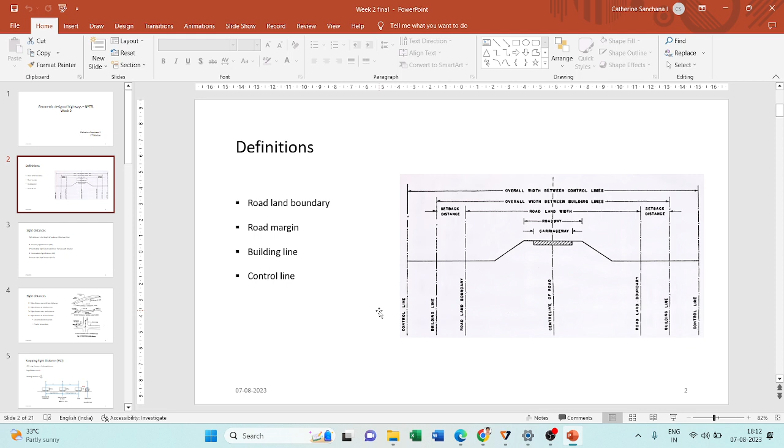So first we will start with the basic definitions. Last week we discussed about design controls, right? And at the end of the topic, we spoke about space requirement. So we will continue with that and some definitions related to space requirement. So one is the road land boundary. So this is the distance. So if you see, this is my carriageway.

Carriageway is the way where the vehicles travel, and adjacent to the carriageway, you will be having shoulders, and the entire width of the carriageway along with the shoulders, you will call it as the roadway. And this entire width, along with provisions for drains and also provisions for future expansion.

Say if I have only 4 lanes now, and in future, based on the traffic growth rate, I might require 6 lanes. So I need some more land, some more space at the sides for future expansion. So including all that, this is just a hypothetical line. Okay, so including all this drainage, carriageway, shoulders, and future expansion, you call it as the road land boundary. Okay, so this is the road land boundary.

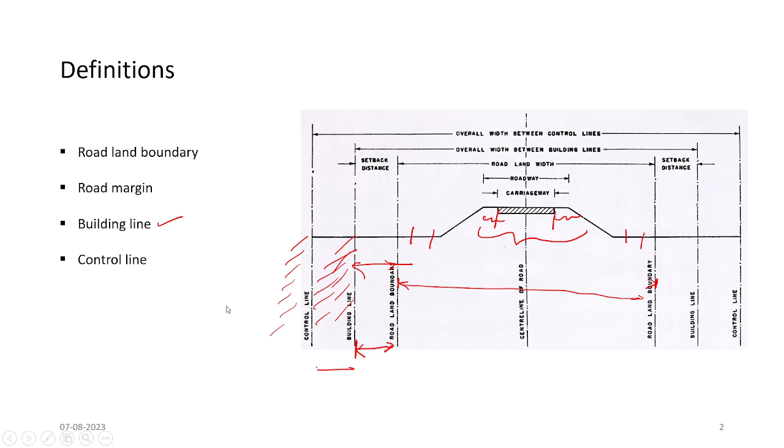Okay, so now moving on to the next topic, which is sight distances. So I want to make this session an interactive one. So it would be nice if one of you could unmute and tell what is a sight distance, what is your understanding of sight distance.

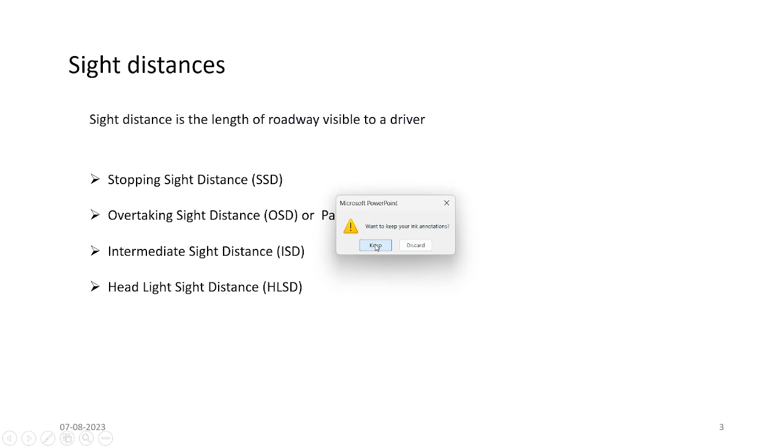No one is going to judge you here, and no one's going to know who is who, so you can openly speak. So what is a sight distance? What is your understanding of sight distance? Because when I was in my BTech, sight distance was kind of confusing to me. So is anyone ready to answer? Okay, then I will answer it myself.

Okay. Sight distance, as it is written here, in simple terms, is the length of roadway visible to a driver. Say you are traveling on a road; at any point of time you will be able to see some distance ahead of you, right? And whatever the distance ahead of you, you should be able to see at least a minimum of sight distance.

Say this is my road, and this is my vehicle. When I'm at this point, say I am able to see till here. My eyesight allows me to see till here. Anything that comes till here, my eyesight is able to see. We will leave out our eyesight and go to the geometric constraints of the road. So our roadway is visible till here. So this distance should be a minimum of SSD.

Okay. Now when I move forward here, I should be able to see a minimum of sight distance, which will be till here. So at any point of time, the roadway which is visible to you, in front of you, should have a minimum distance of SSD. So what is SSD? We will talk later. We were seeing what sight distance is.

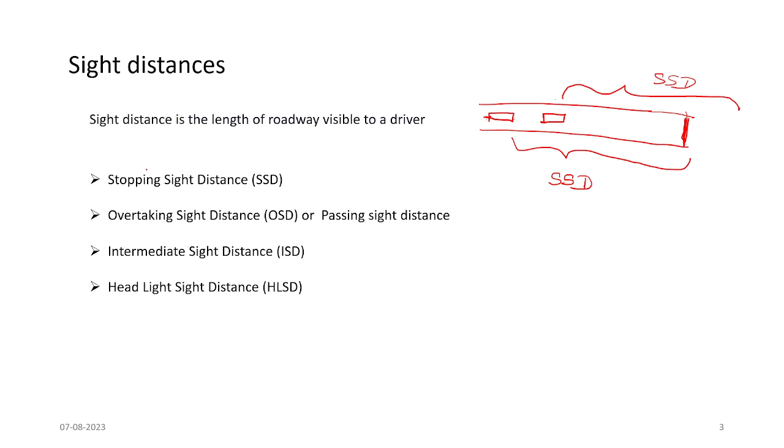Okay, so after this we will see what are the different types of sight distances. Sight distance has many types. The four types that I said here are based on the movement that you make, or based on how you calculate the sight distance: stopping sight distance, overtaking sight distance. So these are different types of sight distances based on one type of classification, and these are another set of sight distances based on where you provide the sight distance.

Say sight distance on multi-lane highways. Are you talking about the sight distance when you are traveling on multi-lane highways? Are you talking about sight distance when you are traveling on a circular curve or on a vertical curve, or say an intersection like this where you have a signal or without a signal? Signal is not a problem. If it is without a signal, then you should be talking about sight distance there also. We will talk about sight distance at an uncontrolled intersection, at a priority intersection, and so on. So these are the different types of sight distances. One is based on the movement that you make, and the other is based on the geometry of the roadway.

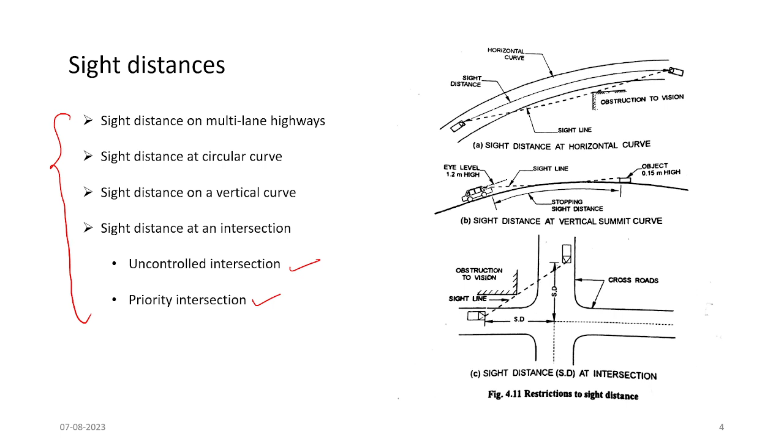Okay, now we will move on to stopping sight distance. So let me just check if there are any questions. Okay, Kavita, is there any question? I see that you've raised your hand. Would you like to? Yes, ma'am. Hello. Yeah, sure. Hello.

Go ahead. Ma'am, I didn't get the exact basic difference between sight distance and stopping sight distance. Okay. Sight distance is, see, when you are traveling on a road, the distance which is visible to you in front of you is the sight distance. Stopping sight distance is the distance that is required for you to stop the vehicle. When you plan to stop the vehicle, you will need some time to make the decision whether you should stop the vehicle or whether you should just slow down your vehicle. So you need some time to take the decision, and after that you will apply the brake. When you apply the brake also, your vehicle is not going to stop immediately. It is going to travel some distance before it comes to a stop.

So the time taken by you to take the decision, during that time also your vehicle would have traveled some distance. And when you apply the brake also, your vehicle is not going to stop immediately, it is going to stop after some distance. So this total distance is what is called the stopping sight distance. When you want to stop the vehicle, you need to see some distance in front of you. If not, you will hit someone. Whereas sight distance in general is the length of the road, the distance which is seen by you. Okay, is it clear?

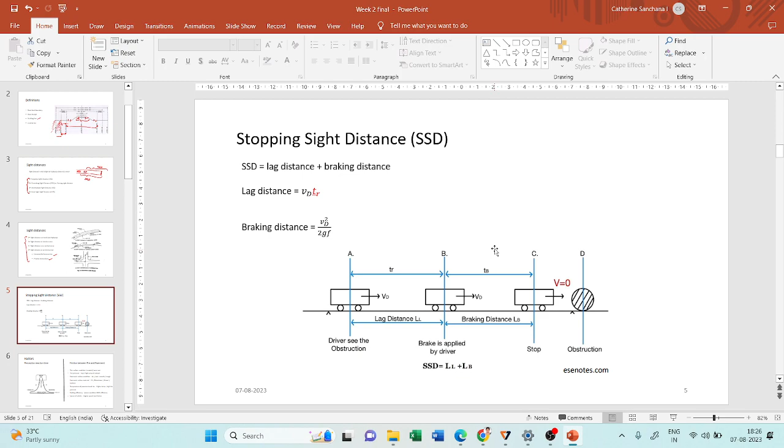So, as I was saying, we will begin with stopping sight distance. Now, what is stopping sight distance and how is it determined? Stopping sight distance is the distance that is required for the driver to stop the vehicle. Now why do you need some distance to stop the vehicle? Imagine I am traveling on a roadway and all of a sudden I see an obstruction. Say a dog is crossing by, then I need to do something so that I do not hit the dog.

There are three maneuvers that I can make to avoid hitting the dog in front of me. Either I can bring the vehicle to a stop, I can apply brakes to my vehicle and bring the vehicle to a stop.

So let me draw. So this is my road and I'm traveling here, and here I see a dog. Okay, either I can apply brakes and bring the vehicle to a stop before I could hit the dog, or before the position of the dog, or there's one more option where you just decide to slow down your vehicle. You see that the dog is only crossing and it is not going to be there stagnant. So if it is just crossing, till it crosses, you just need to slow down your vehicle so that after it crosses, you can just pick up your original speed and move ahead.

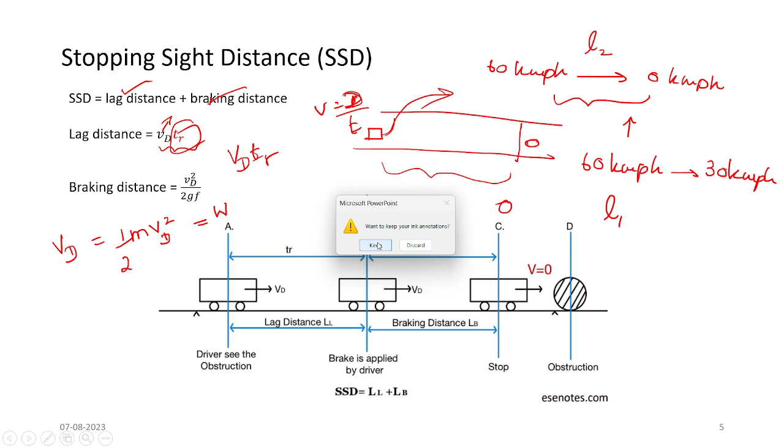Okay, so whenever a vehicle is moving with a velocity and it has a mass, then it has some kinetic energy associated with it. So when my vehicle is moving with a velocity of Vd, it has a kinetic energy of half m Vd square. Now this is equal to the friction that is associated with the vehicle. Let me go to a new slide.

So this object will have a kinetic energy. Kinetic energy is equal to half m Vd square, where m is the mass of the vehicle and Vd is the velocity of the vehicle. So the kinetic energy of the vehicle when it is moving at a velocity of Vd is half m Vd square. Now this kinetic energy change is nothing but work done due to friction force. No, let me explain like this.

So this is the road, and initially it has a speed of Vd, and when it comes to rest, it has a speed of 0. So there is a change in kinetic energy, right? It has a kinetic energy of half m Vd square at this point, and it has a kinetic energy of 0. This change in kinetic energy is because of the brakes that I'm applying, and it comes to a stop because of the frictional force between the tire and the pavement.

Okay, so I'm going to equate these two. So the change in kinetic energy, which is half m Vd square minus 0, is equal to the change in frictional force.

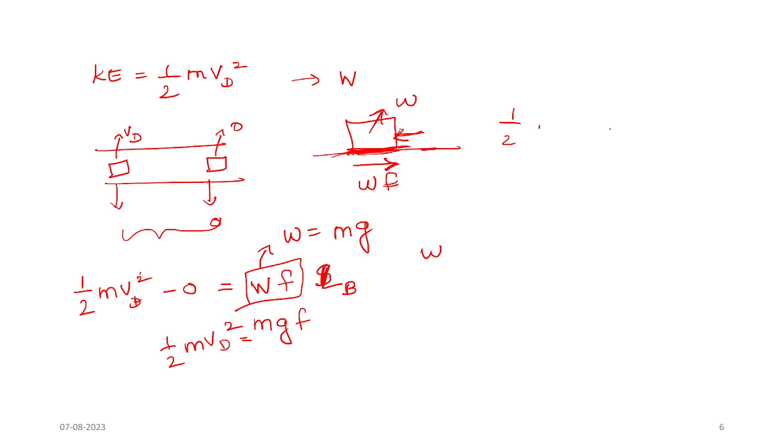Sorry for confusing. So the change in kinetic energy is the work done by the system due to the frictional force, and this work done is nothing but this frictional force into distance traveled. So half into mvd square is equal to wf into lb, where lb is the braking distance. So if you substitute for weight as m into g and rearrange, you will get lb as vd square divided by 2gf. So this is how you will get the braking distance.

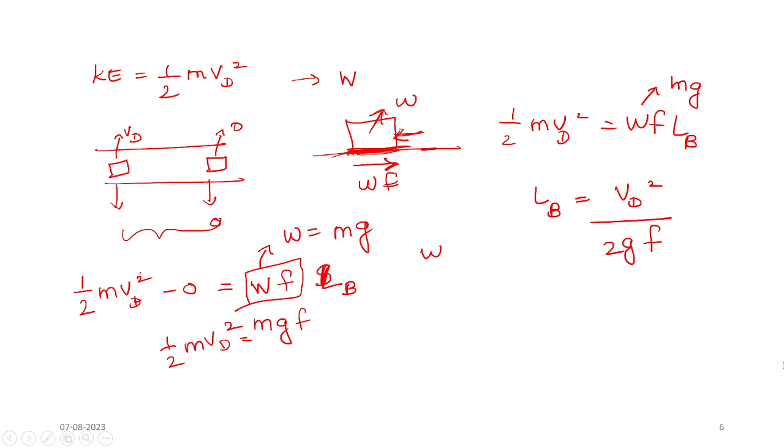Now moving on to the factors that affect this sight distance. So if you see from the equation here, for lag distance, obviously in both these terms, the vehicle speed is going to affect the sight distance. Since it is directly proportional, since it is in the numerator, with an increase in speed, my sight distance is going to increase. So that is obvious, very clear.

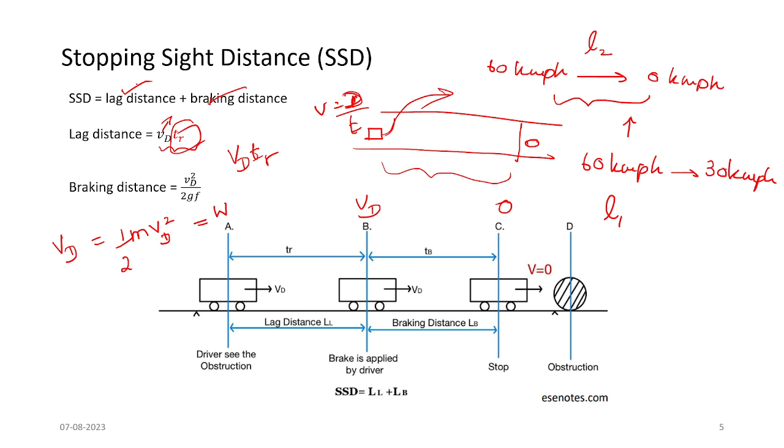Now, there are some more terms associated with it. G, acceleration due to gravity, is constant. Except for some points on the earth, it might vary a little bit, but mostly we will take the average acceleration due to gravity as 9.81, right? So leaving behind Vd and G, what are the other factors that affect sight distance? It is the perception reaction time and the longitudinal friction coefficient F. So these are the two factors that affect the stopping sight distance.

So let us see about the perception reaction time. It has four components, which we call the PIEV theory. It is the time taken for you to perceive the situation, and then I is for your senses to connect to the brain to say that I have perceived some situation. So first, P is for you to perceive the situation, that I have seen some obstruction and that I have to do something about it. So you transfer this information to the brain.

Now this information goes to the brain, and the brain will take some decision on what needs to be done, whether you have to stop the vehicle, slow down the vehicle, or just turn the steering of your vehicle. So your brain has to take some decision, and then it has to command your senses to apply some action. Say it will ask your leg to apply brake on the system, or ask your hand to apply brake on the system. So this theory is called the PIEV theory.

So for the reaction to go from your body to the brain, and from the brain the command has to come to the system to take some action. During this phenomenon, there is some time associated with it, which we call the perception reaction time. Now, this will depend on many factors, such as the experience of the driver, the gender of the driver, the mood of the driver, the condition of the driver, and so on. So perception reaction time depends on the type of the driver and his characteristics.

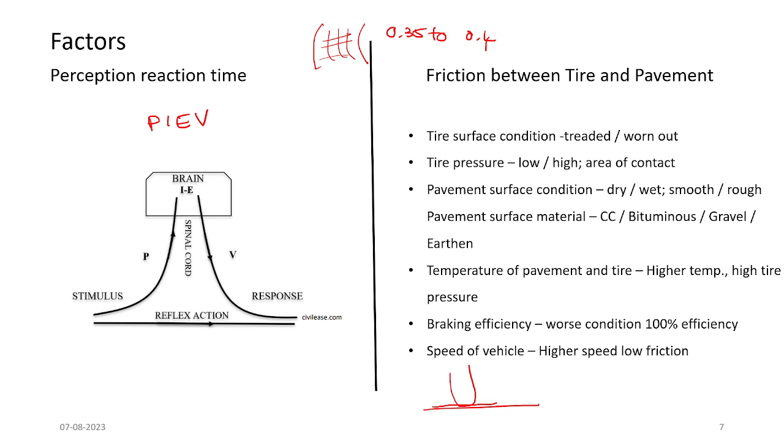It will usually vary between 0.35 to 0.4. This is the longitudinal frictional coefficient, and this variation of 0.35 to 0.4 will depend on the speed of the vehicle. Okay, so that tabular column has also been shared by Sir.

Now, what we were talking about till now is stopping sight distance on a level surface. Okay, so when you are traveling on a gradient, on a sloped region, the stopping sight distance will be more or less depending on how you travel on the slope: if you're traveling on an upward slope, or on a downward slope. Now, say if you're traveling on an upward slope, your braking distance is going to be less.

When you apply brakes, the lag distance is going to be the same everywhere because it depends on my reaction time. It does not depend on the surface of the road. So lag distance is going to be the same everywhere, even on a sloped region, even when you're traveling on a gradient. Whereas the braking distance will depend on the slope, because if you're traveling on an upward gradient, when you apply brakes, it will come to a stop much sooner because the gradient is also supporting you.

When you're traveling on a downward gradient, there's gravitational force which is against you, which pulls you further. So there's an effect of this gravitational force when you travel down the slope. So the stopping sight distance or the braking distance will be more when you travel on a downward gradient, and it will be less when you travel on an upward gradient.

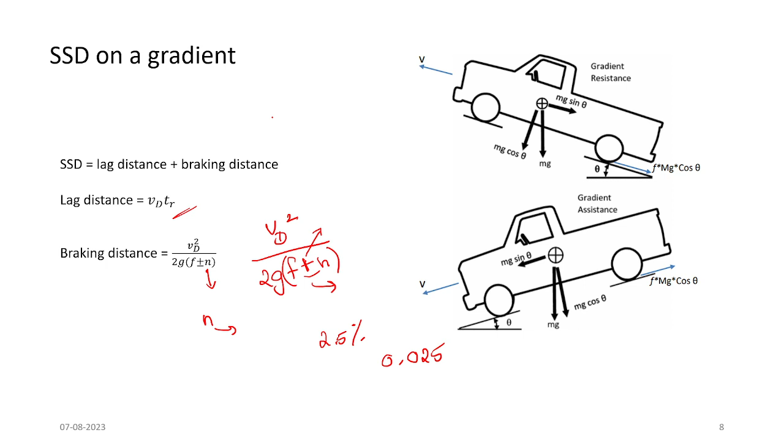Yeah. So we will just see briefly how this equation came. Now, we were talking about frictional force on a level surface, right? Here, if we take an upward gradient, the weight will always be acting vertically down, right? So the weight will be acting vertically down, which is mg.

Now this frictional force has to be resolved into horizontal and vertical components, because if you're traveling on a slant, a sloping region, then the frictional force will also be in that direction only. When you are on a level surface, weight is acting vertically down, and when you're trying to move any object horizontally, the frictional force will be equal and opposite to that direction, which is again horizontal.

Whereas say you are keeping a box on a sloping plane, your weight will act vertically down, whereas your box will try to slide down like this because of gravity. But because of the friction between the bottom of the surface and this plane, the box may remain at rest, because the frictional force will be acting equal and opposite along the slant, equal and opposite to the gravitational pull being applied on this box.

So you have to take this slanting component as well as the weight of the box in this direction. That is what we do in the case of a car as well. We resolve the force into vertical and horizontal components with respect to the sloping road, and then this mv squared is the change in kinetic energy. This kinetic energy is in this direction, so it has to be equated with the frictional force as well as the horizontal component of the vehicle's weight, multiplied by the distance.

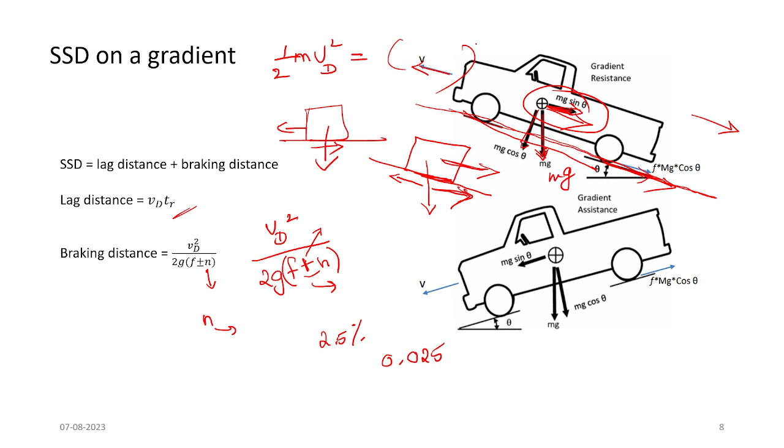So initially you had only the frictional force. Now you have the frictional force due to the vertical component, as well as the horizontal component of the vehicle's weight. Both these forces will be coming here on the right hand side, multiplied by the braking distance. If you want, I can show it once more.

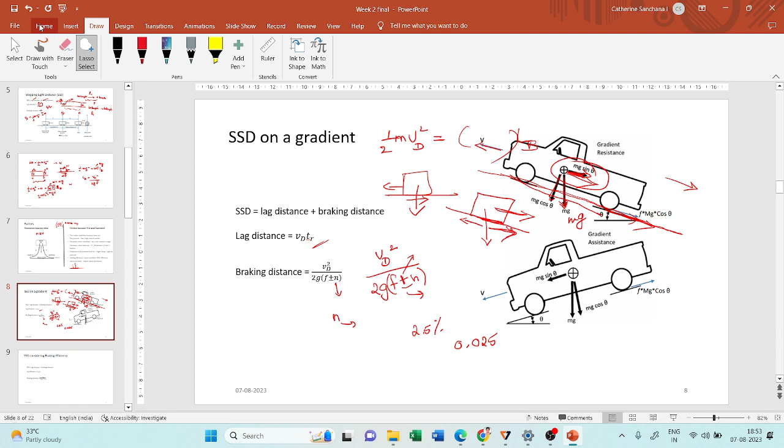Okay, so this is my vehicle. It has a weight mg from the CG, which is acting vertically downwards. Now I have to resolve the forces according to the direction of the plane. So I have a vertical component for this weight, and I have a horizontal component for this weight. As well as this, there will be a frictional force between the pavement and the vehicle, which will be acting in this direction.

Yeah, sorry, which will be acting in this direction, because my vehicle is moving in this direction, so the friction is in the opposite direction. So this is the frictional component, and this is the horizontal component of the weight of the vehicle. These two forces are acting in this direction, opposite to the movement of the vehicle with velocity v, trying to bring it to rest.

So you have to equate these two. The change in kinetic energy is equal to the summation of these forces into the braking distance. From here, you can calculate the braking distance. So this is how the equation for SSD on a gradient is calculated. This has also been given in the slides. If you have any doubt, please ask me. Feel free to stop me and ask me in between.

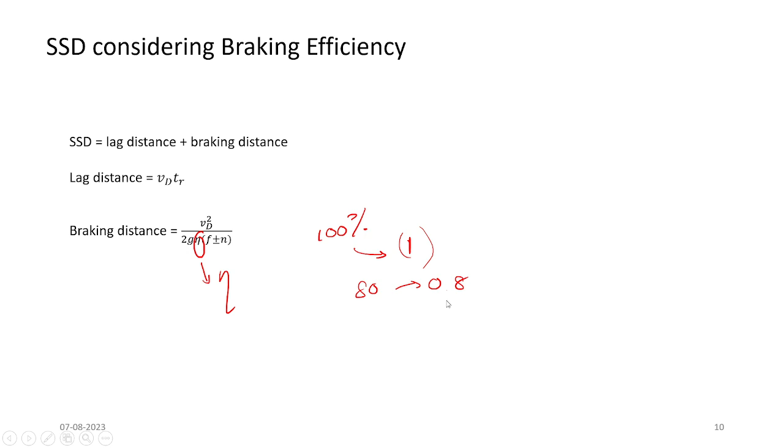Now coming to overtaking sight distance. Now what is overtaking sight distance? Why is there a need for overtaking?

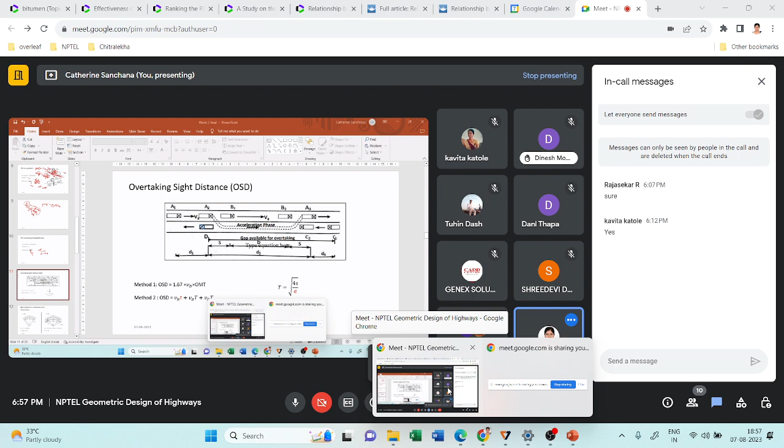So let us see if there are any questions. Okay. If you have any questions, please feel free to ask. Do you people have any questions?

Okay, so we will move on to overtaking sight distance. So what is overtaking sight distance? Why is there a need for overtaking sight distance? So we've all heard of the term overtaking, right? When you're traveling on a road, if a person in front of you is so lousy, is traveling very slow, then you cannot be traveling with the same speed as his. Because you're traveling behind him, you will also be forced to travel at the same speed as the vehicle in front of you, unless and until you overtake the vehicle and start going ahead of him.

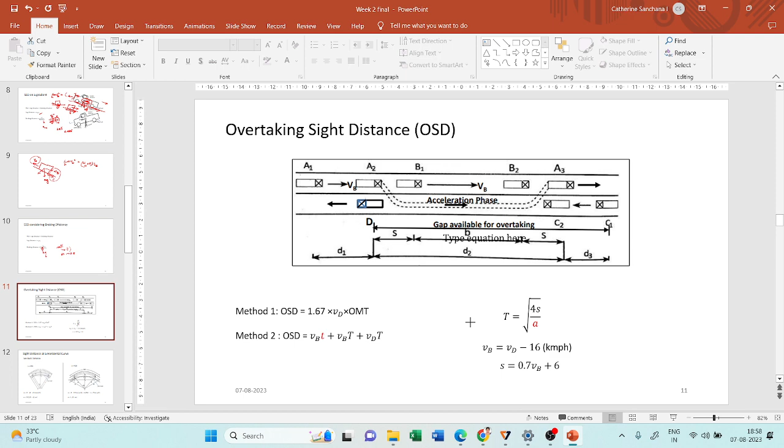So that is why we have this concept of overtaking, right? So all the vehicles on the road will not be traveling at the same speed, so there will always be one vehicle which will have the need to overtake a slow moving vehicle in front of it so that it can move ahead, right? So that is overtaking, and you cannot overtake anywhere on the road. You need proper distance in front of you. So here also we call it sight distance, because sight distance is what you see in front of you. For overtaking, you need a sight distance. For stopping, you need a sight distance.

Okay. So sight distance is a general term, whereas stopping or overtaking depends on the maneuver that you make. So overtaking sight distance means I'm going to do an overtaking maneuver. Stopping distance means I'm going to do a stopping maneuver. So stopping or overtaking sight distance will depend on the maneuver that I make, and sight distance is a general term which allows me to do that maneuver. So stopping sight distance means I need a sight distance ahead of me so that I can stop the vehicle safely, and overtaking sight distance means I need a distance visible to me in front of me to overtake safely. Okay, so this is the main difference between sight distance and overtaking sight distance, and sight distance and stopping sight distance.

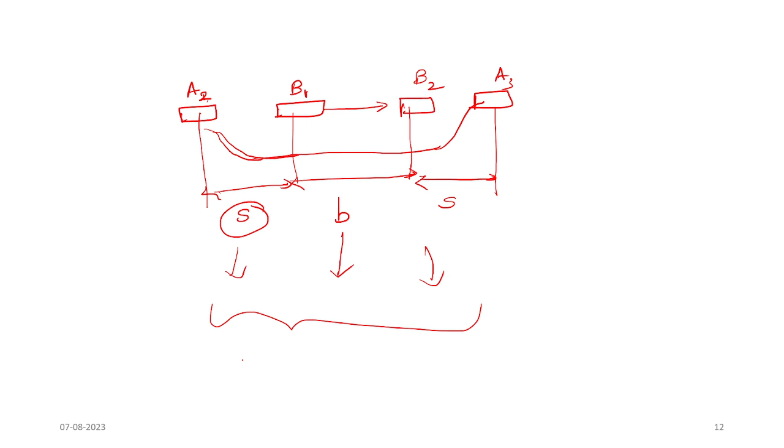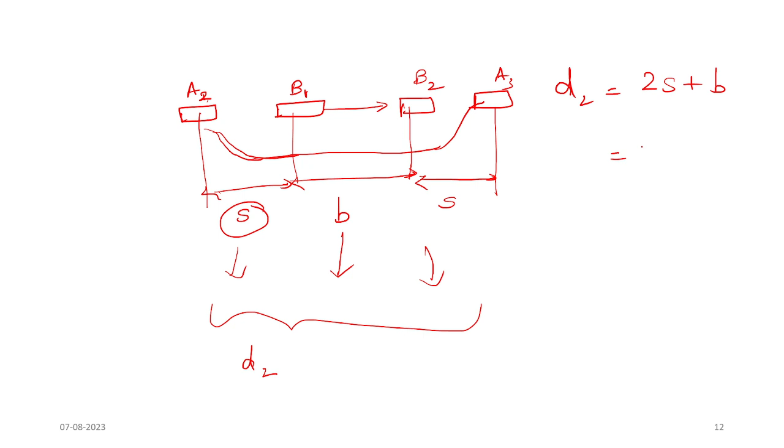So this entire distance, I will take it as d2, right? So d2 is equal to 2s plus b, right? And this is nothing but 2s plus Vb into T. So what is this capital T? This is different from the small t that we discussed earlier. So this capital T is the time taken by the vehicle A to move from A2 to A3, which I will call as the overtaking time.

Okay. So this overtaking time is taken as capital T, and during this overtaking time only this vehicle B is also moving from B1 to B2. So Vb into capital T will be equal to this small b. Okay, so d2 is equal to this. Now, how will I find out this T? You know what is the value of S. There's an equation to find out the value of S.

So value of S is equal to 0.7 Vb plus 6. So this is the length of the vehicle, average length of the vehicle. This is similar to the stopping sight distance. Say this is the reaction time. Say I'm traveling behind a vehicle and I will be very cautious, right? So my reaction time will be less. I'm following the vehicle, so if the vehicle in front of me stops suddenly, it is not an unexpected situation.

The vehicle stopping in front of me is kind of an expected situation. It can do that anytime. So my reaction time is kind of lesser when the vehicle in front of me stops suddenly. Okay, so 0.7 is the reaction time, Vb is the speed of the vehicle, and 6 is, instead of taking braking distance, we simply take it as the average length of the vehicle. So this spacing between the vehicles is calculated using this formula.

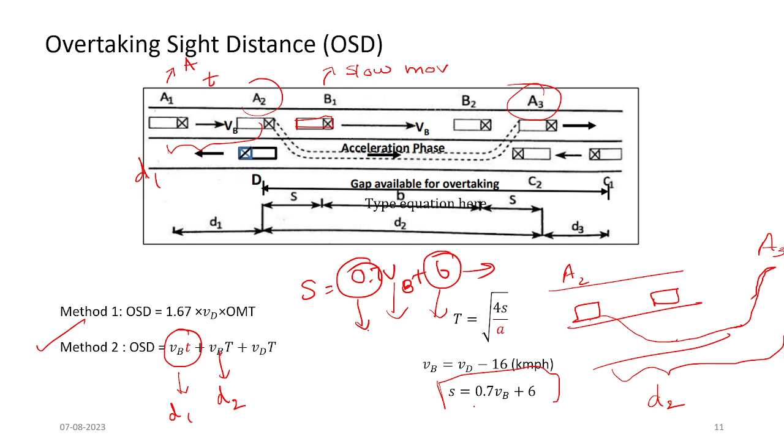Okay, and Vb, we know what Vb is. Vb is the velocity of the slower moving vehicle. So there's one standard formula for finding Vb. You assume that if Vd is the design speed of the road, say my road is designed for 70 kilometers per hour, my Vb, that is the slower moving vehicle, is going to be traveling at a speed of 16 kilometers per hour less than Vd. So it will be Vd minus 16. So that will be my Vb.

So Vb I know, S I know based on the formula. Now how to find out this T? So this T also has a formula, which is T is equal to root of 4S by a. Now how did we end up in this formula? Last time also I was discussing about the equations of motion. There are three equations of motion. Now we will use one equation of motion here to find out how this T was determined.

Okay, so there's an equation, S is equal to ut plus half at square. This is the equation of motion that we learnt in high school physics. So this means that if my vehicle is traveling at an initial speed of u, or say it is Vb.

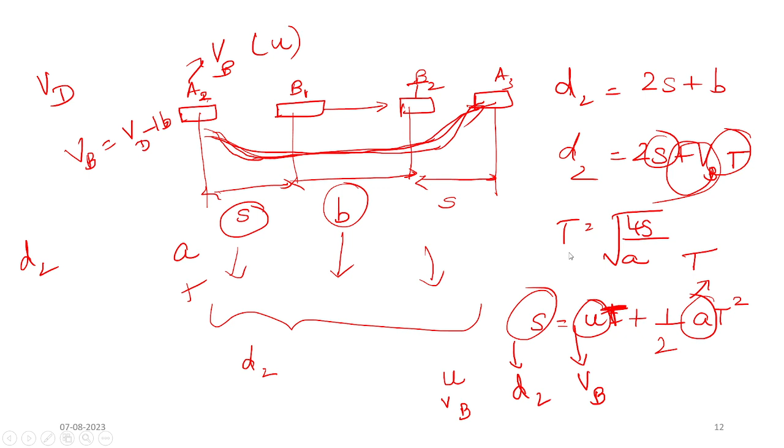So this s is d2, this u is the initial speed of the vehicle, which is vb, t is the overtaking time, and a is the acceleration. Now you have two equations. One is d2 = s + vb·t + s, and the other is d2 = vb·t + ½at².

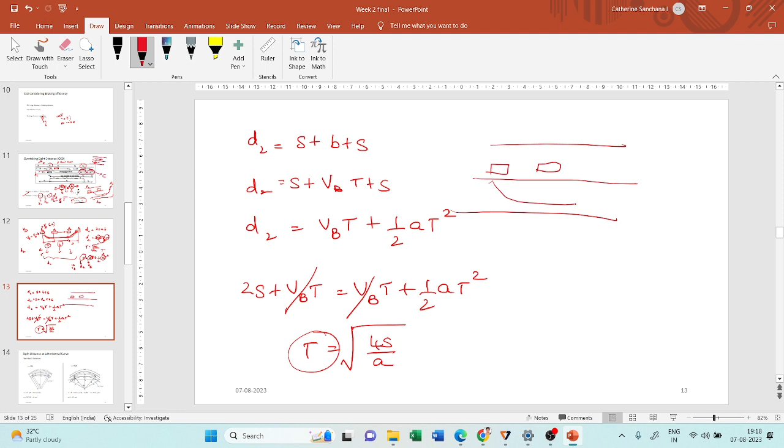So there is a two-lane two-way road. This is my vehicle A. I'm following B and I'm overtaking this vehicle, and I see a vehicle coming opposite to me. But I should not hit the vehicle, right? I should not collide with the vehicle.

So for me to make this overtaking action and go back safe here in this position, when I complete this overtaking action at time t, this vehicle should be parallel to me. Okay, should be exactly parallel to me, which means it should have been here at the beginning of the overtaking. It should have been some distance here. Okay, so this distance traveled by vehicle C, I will call it as D3. Now let me reiterate.

So I'm overtaking and I'm moving to the correct lane. By that time, I'm seeing a vehicle opposite to me. That vehicle should be at some distance behind, which is this position. So when I start the overtaking action, it should be in this position. Only then, when I finish this overtaking action, both of us will be safe without any head-on collision. So this distance traveled by vehicle C, I will call it as D3.

Now this vehicle will be traveling at design speed because it is traveling the opposite direction. It is not traveling slower. We will assume that it is traveling at a design speed for worst case scenario. So it is traveling at a design speed, and the distance traveled will be taken into account only for the time of overtaking. So what is the distance traveled by vehicle C? This distance d3 will be Vd into T. So during this overtaking maneuver, how much distance the opposite vehicle has traveled, that is d3. So these are the three components of the overtaking sight distance.

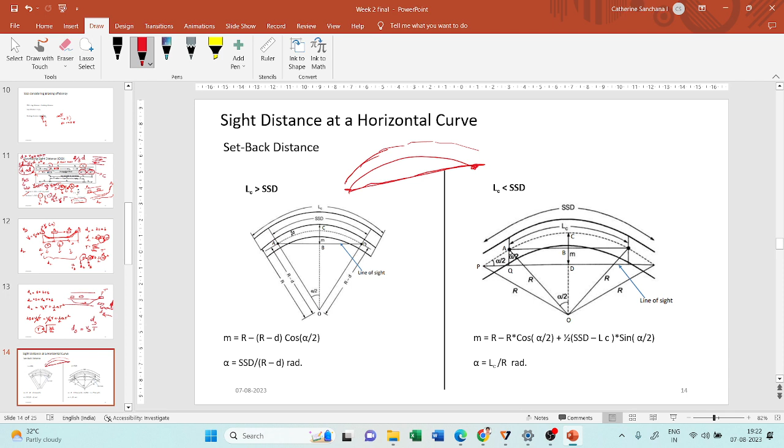Now let us move on to horizontal curves. I just want to move faster because we have problems to solve. So let us say I'm traveling on a horizontal curve, a curved location. If I'm at this position and I see a vehicle here, this is my line of sight. Then this is the direction along which I travel. So this curved distance in front of me till the obstruction should be minimum of SSD, the same formula that we used. You can take into consideration the effect of grade or braking efficiency, all that. So the SSD equation is the same.

So what is the thing that you want to calculate here? There's something called the setback distance. If I want the sight distance SSD here, then my obstruction, say there can be any building here, okay? Beyond this, your view is restricted. I'm here, my line of sight is here. Beyond this, there are buildings which affect my visibility, okay? So from the center of the roadway to any obstruction which is there in the turning, that I will call the setback distance.

So this setback distance should be such that I should be able to see till here. Only then my distance from my location of vehicle to the obstruction here will give me SSD. So the problem here is SSD, you know the calculation. So you simply have to find out what is the setback distance. So there's a formula to find out setback distance.

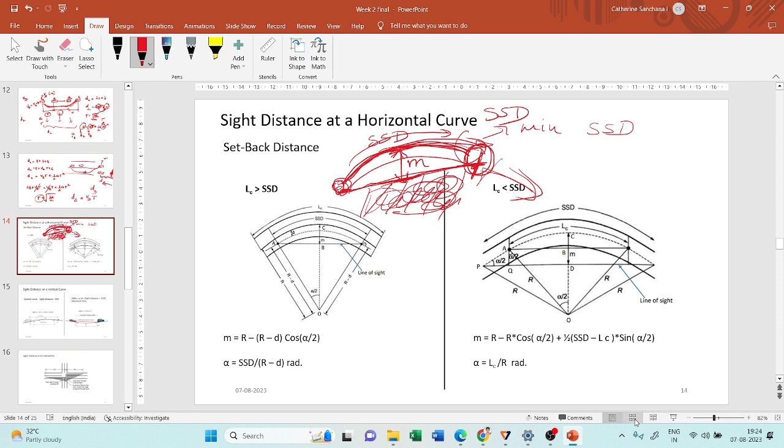Yeah. So setback distance, say I'm having a curve here. This is my road. This is the length of the curve. The total distance is the length of the curve. And this distance is SSD. Okay. Now I have to find out. Now my obstruction is here. Okay, my obstruction is here. That is, some building is here.

So my line of sight from this point to this point passes like this. Okay, and say this is the center of my roadway. Okay, yes. Sorry, I'm drawing poor diagrams. So let me discuss it with this diagram itself so that it will be clear.

So this is the SSD. SSD will always be calculated with respect to the inner length. Why? Because on a circle, the inner radius will be lesser, so the inner distance will be lesser than the outer distance, right? So it is always safe to calculate SSD on the innermost lane.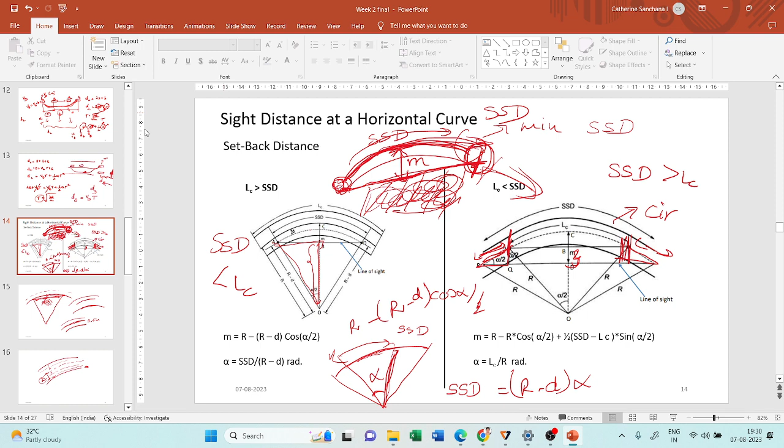So quickly, now we saw sight distance on a horizontal curve. Now we will see what sight distance is on a vertical curve. On a vertical curve, the sight distance is always restricted by the grade of the section, right? If there is an upward gradient in front of you, you cannot see beyond a certain point. So for an upward gradient, which we call a summit curve, the minimum sight distance required will be equal to SSD. So this is what sight distance on a summit curve is about.

Whereas a valley curve is a downward curve: it will go downward, and then it will go upward, if you see this figure. For this case, during daytime, you won't have any problem because you will be able to see the entire length of the curve. Whereas during night time, the visibility ahead of you will depend on your headlight beam. How much distance your headlight can illuminate ahead of you will be your sight distance, and that distance should be a minimum of SSD.

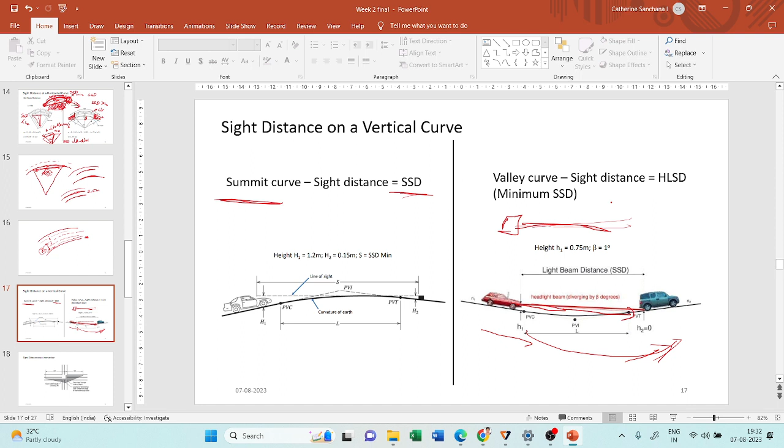So in a valley curve, nighttime is a problem, and that is what we call headlight sight distance. If this is my vehicle, my beam will not be straight, but it will be at an upward angle. So this angle will also play a role in illuminating the distance in front of me. That distance at night time should be a minimum of SSD, because only then, if an obstruction crosses me, I will be able to stop my vehicle safely.

There's something else called intersection sight distance. So this is an intersection, right? If there's a signal at the intersection, there is no problem. You will stop the vehicle, because you anticipate what is going to happen. You know there will be a red light or a green light at the signal, so you know when to stop and when to restart your vehicle. A controlled intersection is when you have signals. But when you have an uncontrolled intersection, or say a priority intersection, and we will see what uncontrolled and priority are, in both cases you need to provide SSD.

Why do we need to provide SSD? Because there will be vehicles traveling in this direction and vehicles traveling in this direction, and there's not going to be any control. You have to judge and cross the road on your own. No one's going to tell you whether you should stop the vehicle, whether there's a vehicle coming in front of you. So you have to make your own decisions. For that, you need to provide a minimum of stopping sight distance.

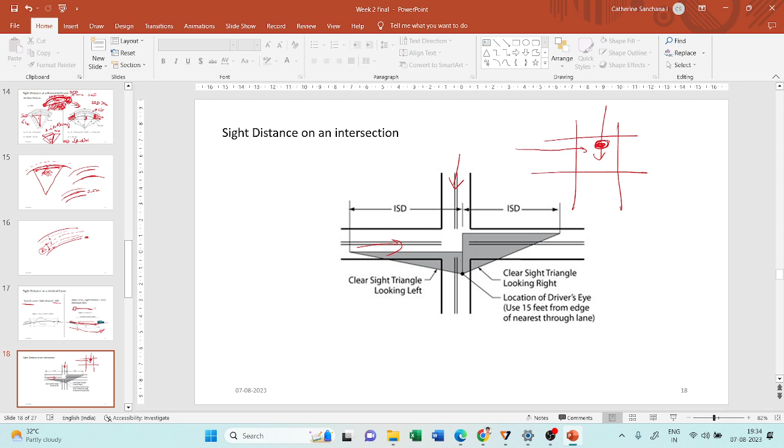So let us say this is my intersection, one vehicle is traveling here and my vehicle is traveling in this direction. So this is the point of collision, right? If the two vehicles were to collide, they will collide at this point because they will cross each other here. So from this point, you have to check whether there is a distance of SSD in this direction for the vehicle traveling this way, and SSD in this direction for the other vehicle. Based on that, you will have a sight triangle. My vehicle is here.

So at this point, this is the collision point. From here, I should have a distance of SSD in this direction and SSD in this direction. My vehicle is here, one more vehicle is here. So this is vehicle A and this is vehicle B. Only if vehicle A is able to see vehicle B at this point, only then my vehicle will be able to stop or slow down and make a decision.

So there has to be a line of sight like this. Now if there is any obstruction here blocking this line of sight, then my sight distance will decrease, because if there's an obstruction here, my vehicle will not be able to see vehicle B at this point. It will be able to see vehicle B only at this point, maybe. If there's an obstruction here, then there's not enough distance for me to stop the vehicle.

So in that case, if there's any obstruction here, either I have to remove the obstruction. Say if it is a tree or something which is removable, then I have to cut down the tree or remove the obstruction which is there in the line of sight. If not, if it is a building and I can't do anything about it, then you have to provide a proper sign saying reduce the speed of the vehicle, and for that speed the SSD should be satisfied.

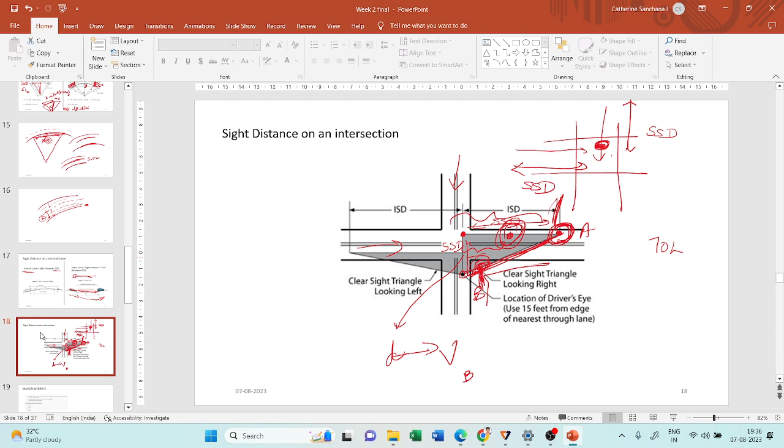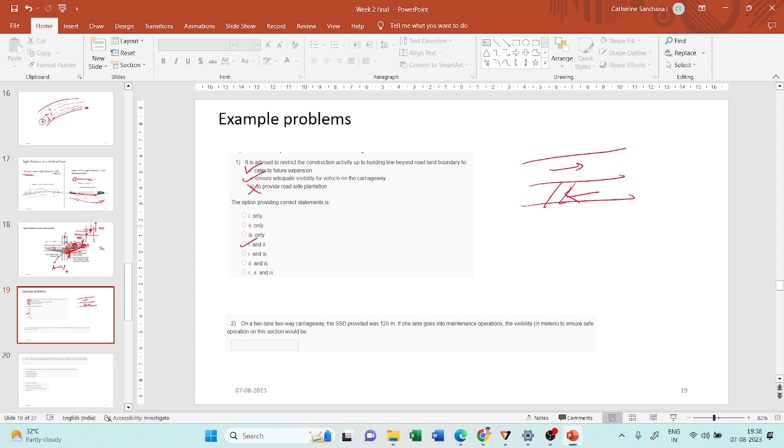On a two-lane two-way carriageway, the SSD provided was 120 meters. If one lane goes into maintenance operations, what would the safe operation on this section be? So there is a two-lane two-way. Now, if this goes into maintenance, both the vehicles will be traveling in one lane only. So if there's only one lane and vehicles are traveling in both directions, then both vehicles should have a stopping sight distance ahead of them.

So this should have a stopping sight distance of SSD, and this vehicle should also have a stopping sight distance of SSD. So if two vehicles are approaching each other, there should be a distance of 2 into SSD, so that when they stop, they don't collide into each other. So when it is a single-lane two-way road, the safe sight distance required is 2 times SSD. If SSD is 120, then the safe distance is 240 meters.

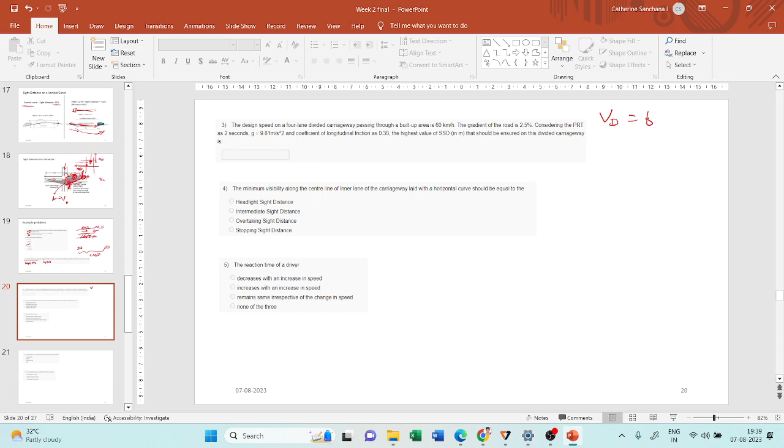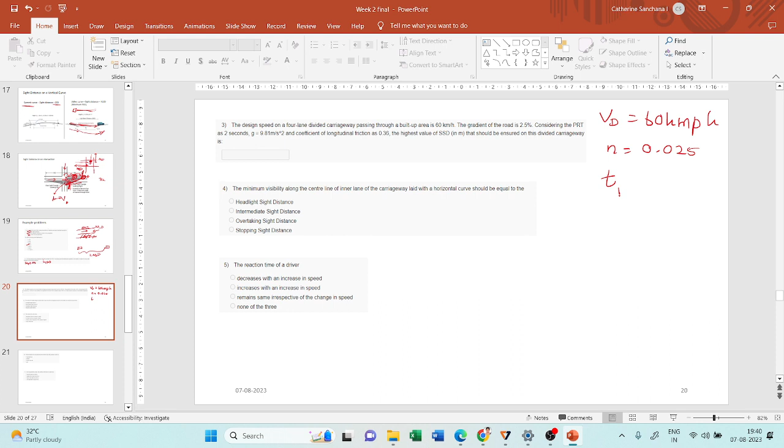The design speed on a 4-lane divided carriageway passing through a built-up area is 60 kilometers per hour. The gradient of the road is 2.5, that is 0.025 in fractions. The perception reaction time is 2 seconds. g is given as 9.81 meters per second square, and the coefficient of longitudinal friction f is 0.36. The highest value of SSD that should be ensured on this divided carriageway is what?

Okay, so SSD is equal to lag distance plus braking distance, right? So lag distance will be VD into TR. So which will be 60 into 1000 by 3600. It's in kmph, I'm converting it into meters per second. Okay, so that is why I'm multiplying that by 1000 by 3600, into TR will give me a distance. Okay, if any one of you has a calculator, you can calculate and let me know what this distance is. So this is the lag distance.

Now what is the braking distance? Braking distance is Vd square by 2gf. So Vd square will be 60 by 3600 into 1000, the whole square. So plus n, sorry. So the gradient is, it is an upward gradient, right? Okay. This is plus or minus n, right? So for a gradient. So that divided by 2g into what is f? 0.36 plus or minus 0.025.

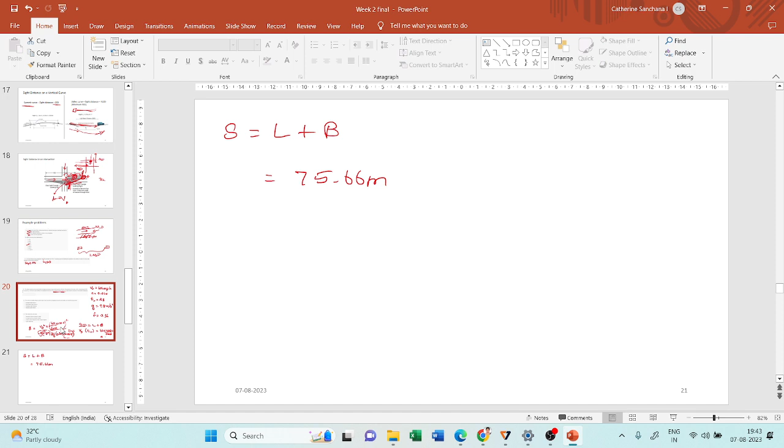Okay. And now moving on to the next problem. So the minimum visibility along the center line of the inner lane of the carriageway laid with a horizontal curve should be equal to what? So we saw horizontal curve and we said that we always take the center line of the inner lane, and we said that the distance should be equal to minimum of SSD, right? So on a horizontal curve, the answer is stopping sight distance.

Okay, and moving on to the next problem, the reaction time of a driver. So the reaction time of a driver, if you see the factors affecting the perception reaction time of the driver in sir's slides, you will see that the reaction time of the driver decreases with an increase in speed. Okay, so this is the solution to problem 5.

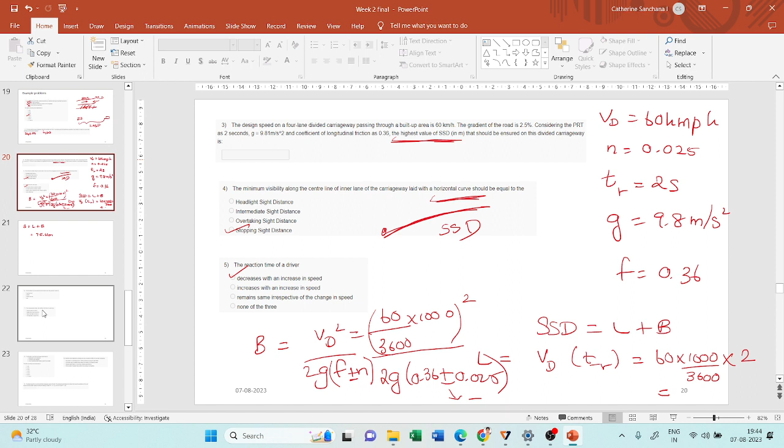Now moving on to the sixth question. Friction between the tire and the pavement will be lowest when the pavement surface is what? Okay, so we saw that if the pavement surface is rough, friction will be high. If the surface is wet, the friction will be low. So when will it be the lowest? When it has a combination of both a smooth pavement along with a wet pavement. So the lowest friction will be when the pavement is both smooth and wet. Okay, this makes sense, right? So moving on to the next question.

On a dry pavement surface, the coefficient of friction of a new tire is how much? So for this, it will be, so this is a new tire. So for a new tire, we saw it will have treads, and if it has treads, it is going to have a better friction. So let us, for comparison, take an old tire with worn out treads. So it will be smooth, so the friction will be less. Okay, so for a new tire, will the coefficient of friction be equal to that of an old tire? No, because this has a treaded surface, this has a smooth surface, so this is not the answer. Will it be greater than that of an old tire?

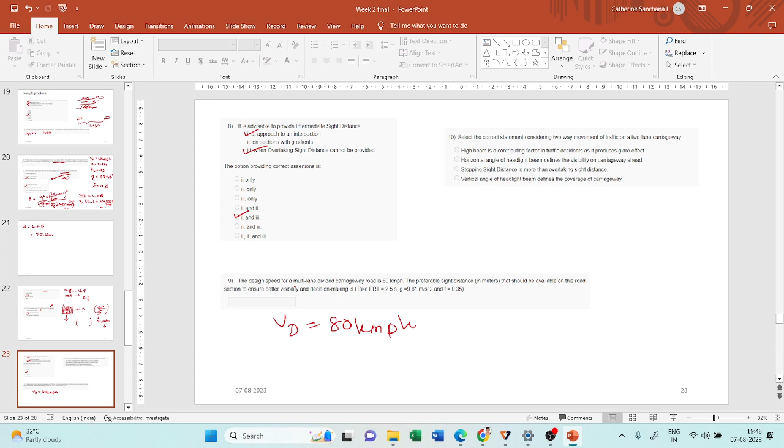there's one keyword here. It is said that it is a multi-lane divided carriageway. So when it is a multi-lane divided carriageway, the sight distance that is required is not SSD, but it is twice that of SSD, because for multi-lane they say that you require a better visibility, so you will not provide SSD for safe movements. You have to provide twice the SSD for safe movements. Okay,

so SSD, how will you find out? It is simply lag distance plus braking distance. So in sir's slides, you would have found this equation. SSD lag distance, it is 0.278 V into tr, and braking distance. So this is lag distance, and braking distance is equals to V square by 254 F. Yeah, right. Now, how did you get this 0.278 and 254?

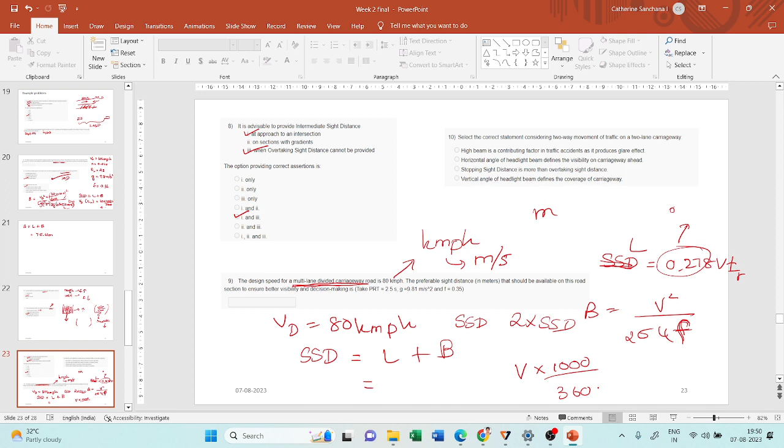So they have given you, in most of the cases, velocity in terms of kilometers per hour. But length, distance, you will always find out in units of meters, right? So in order to make the unit conversions from kilometers per hour to meters per second, they use this 0.278. How? So velocity from kilometers per hour, if I multiply it by 1000 and divide it by 3600, 1000 converts kilometers to meters, and 3600 converts hours to seconds. So if I do this, I will get 0.278 V.

So this is what is used directly in this section. Okay, so instead of multiplying it by 1000 and dividing it by 3600 everywhere to convert kmph to meters per second, we can simply use 0.278 in front of V. Similarly, this V square also, it is a squared term. Yeah. So this is V square by 2gf, right? So V into 1000 by 3600, the whole square, divided by 2gf. So 2g, you know that it is 2 into 9.81. So this is also constant.

So 1000 by 3600, the whole square also you can find out, and collectively this entire term, okay, it will be 1 by 254. So you're simply taking it as V square by 254f. Okay, this is how the numbers came. So you can simply substitute that in this equation and find out what is SSD.

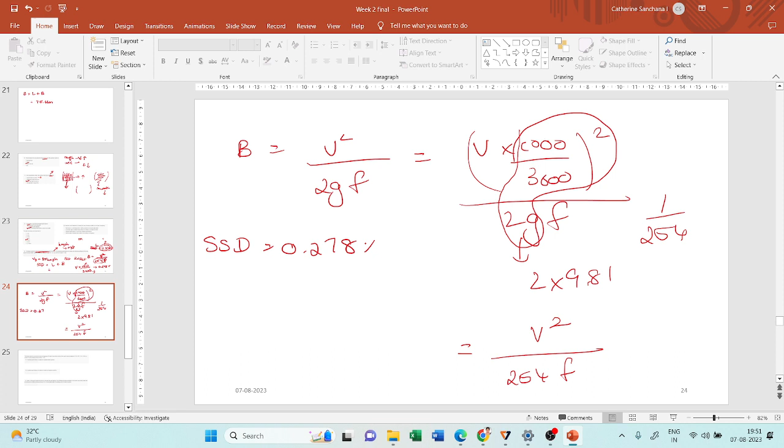So SSD is equals to 0.278 into 80 into 2.5. So this is the lag distance, plus 80 square by 254 into 0.35. This is the braking distance. And this will be equal to 127.59 meters. Okay, so this is SSD. So for multi-lane divided highways, you need 2 times of SSD. Okay, so which will be equal to 254 meters. Okay, so this is the answer to this question.

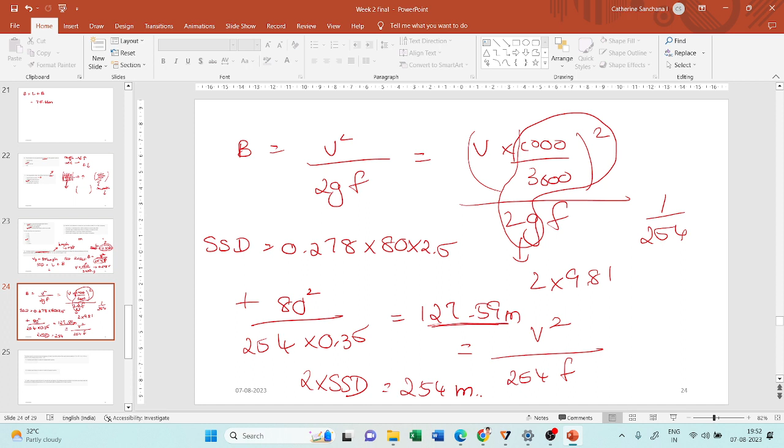Now moving on to the next question. So this question is for both 11 and 12. Now, the design speed on a two-lane two-way carriageway, so VD, is 65 kmph. Okay. A part of the section of this road is laid at a gradient of 1.5%. So N is 0.015. So it is nothing but 1.5 divided by 100. Okay. And perception reaction time, they have given it as 2.5 seconds.

F is equals to 0.36. G is equals to 9.81. Overtaking maneuver time is equals to 11.5 seconds. They've given all this information just to confuse you. All they want is overtaking sight distance for a level stretch. Okay, so what is overtaking sight distance? We saw a simple method to find out overtaking sight distance.

They say that it is a two-lane two-way. So two-lane two-way means you have to find out D1, D2 and D3 and add everything up. Say if you have a divided carriageway, say this has a median in between, there's no way of vehicles coming in the opposite direction in this lane. So you have vehicles moving in only this direction.

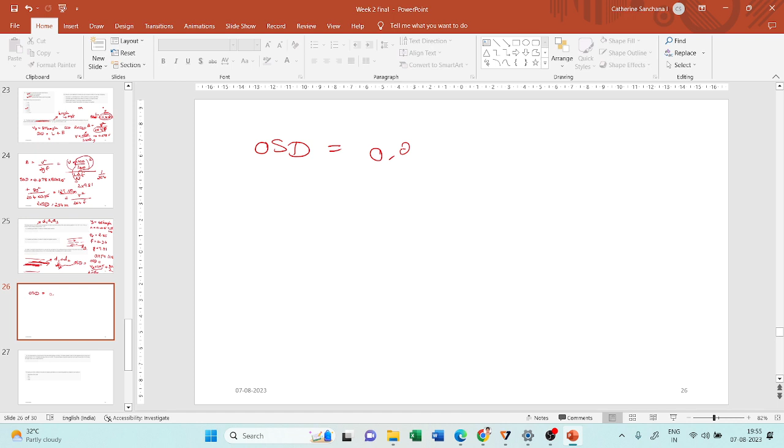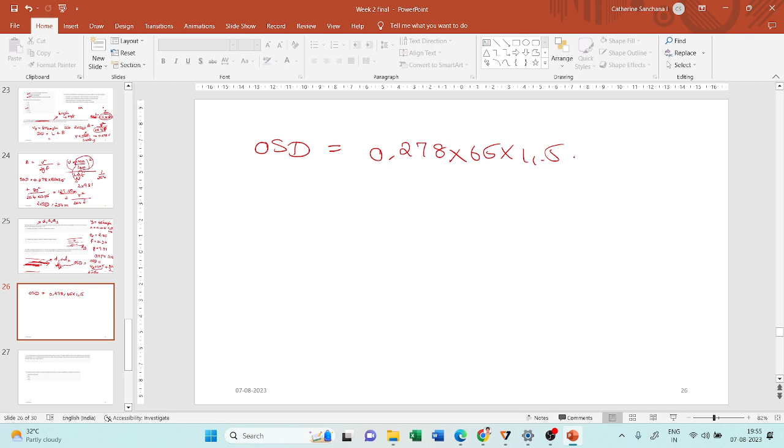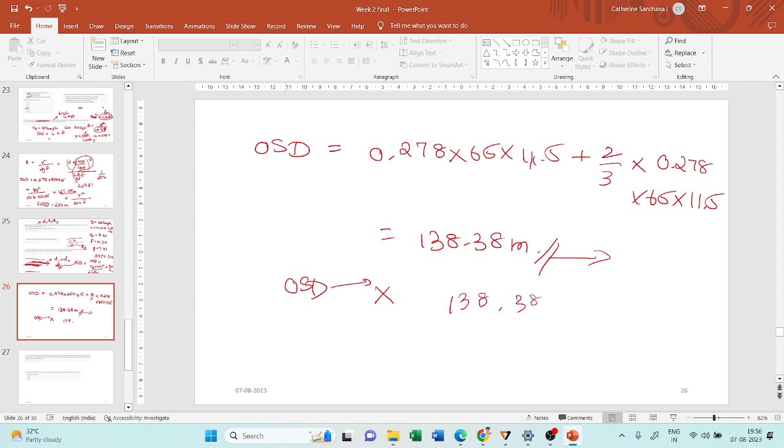Okay, now they've asked for overtaking sight distance on a gradient. So if you see our slides, it would be said that overtaking sight distance does not depend on gradient because all the vehicles will be having the same effect, right? So if your vehicle B, which we saw in the figure, is affected by gradient, vehicle A is also affected by gradient, vehicle C is also affected by gradient. So the effect of gradient will be nullified. So overtaking sight distance does not depend on gradient. This is an important point that needs to be noted. So overtaking sight distance on a level surface and on the gradient will be the same, 138.38 meters.

Okay. Has anyone asked any question? Dinesh, you want to ask something? Ma'am, please once again explain this previous question as I have not understood that well. You meant the overtaking sight distance? Yes, ma'am, the previous question that you have explained recently. Yeah, sure. Okay. So this is the question.

So they have given you a lot of unwanted information. I told you we saw two methods to find out overtaking sight distance. One is they will just give you the overtaking maneuver time. That is the time required for the vehicle to complete the overtaking action. So there are three vehicles involved. If you see that figure, vehicle A, which is our vehicle, say we are going to make the overtaking action. Vehicle B, which is the slower moving vehicle in front of you, and vehicle C, which is the vehicle traveling in the opposite direction. So these are three vehicles involved in the overtaking maneuver.

So if this is the road, my vehicle A is here, B, and C is here. Okay, so the distance traveled by vehicle A for some time behind vehicle B while deciding to make the overtaking action, we will call it D1. And for vehicle A to move to the opposite lane, accelerate, go in front of B and go back to the same lane, this distance is the overtaking action. We will call it D2.

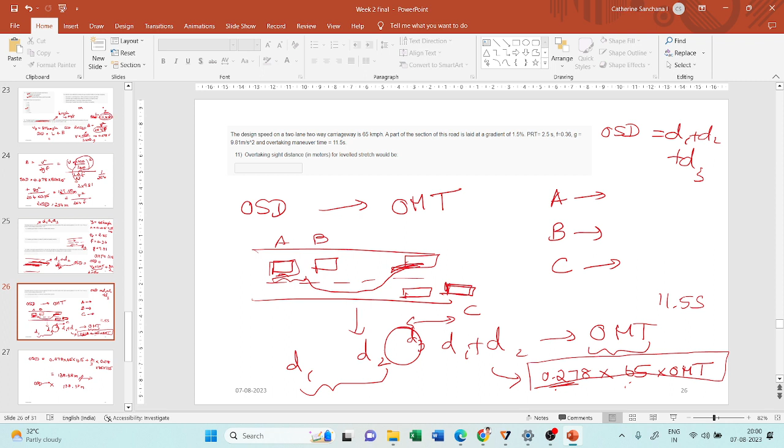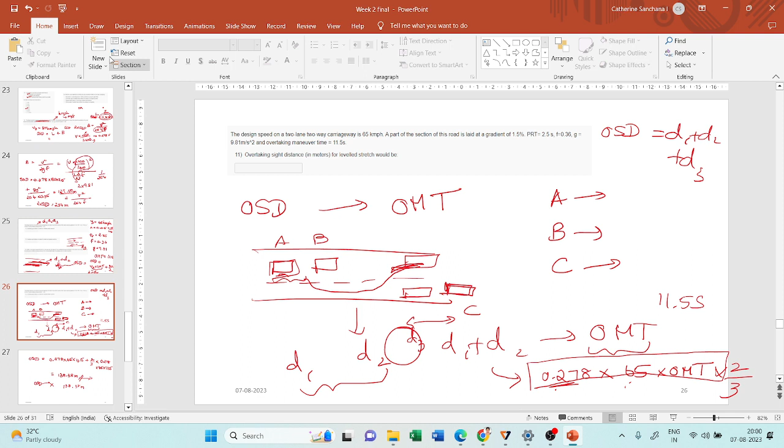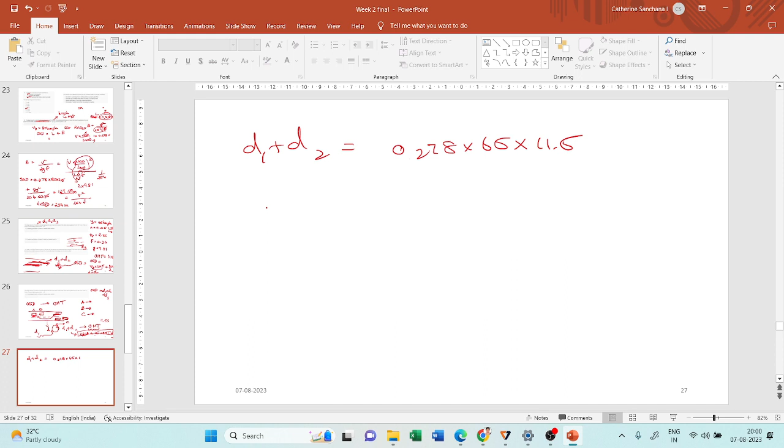Okay, so this distance D3, you found out D1 plus D2, right? So it is 0.278 into 65 into OMT. You simply multiply that by 2 by 3. So D3 is nothing but 2/3 of the distance covered by D1 plus D2. Now D1 plus D2 you had as 0.278 into 65 into 11.5, and D3 is equal to 2/3 of this, 2/3 into 0.278 into 65 into 11.5. So if you add all these three, you will get overtaking sight distance.

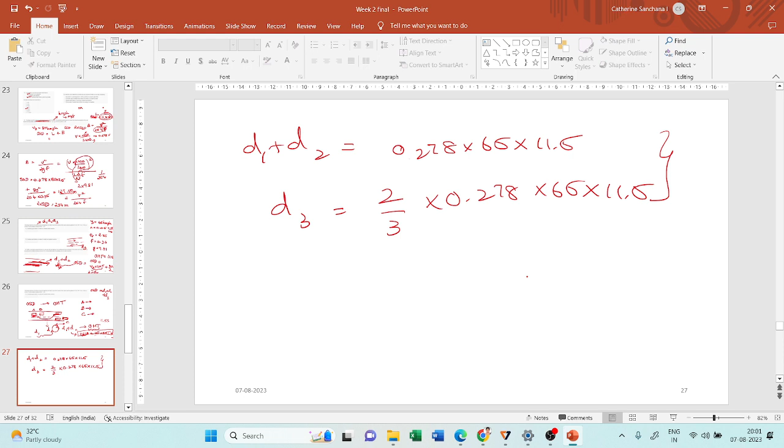Is this fine, Dinesh? Yes, ma'am.

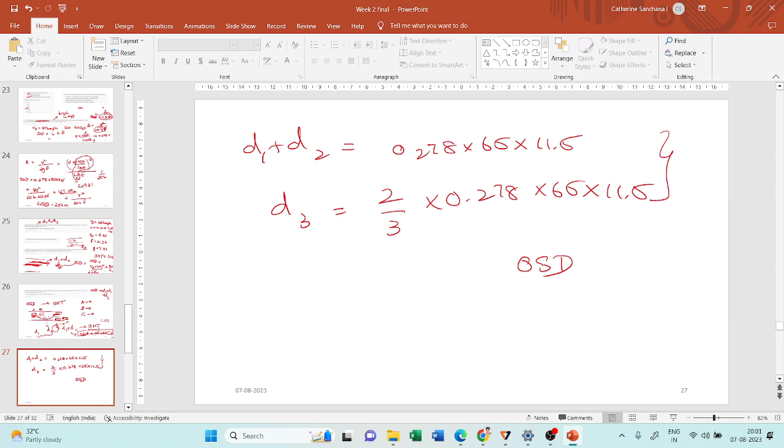So now moving on to the next problem. So we saw that 11 is for a leveled surface, and in 12 they've asked the same problem for a gradient. And we saw that overtaking sight distance is not affected by gradient. So for both 11 and 12, the answer is the same. Now moving on to: traffic is moving at a speed of 60 kilometers per hour on a two-lane, two-way highway. So I will take this question and paste it somewhere else.

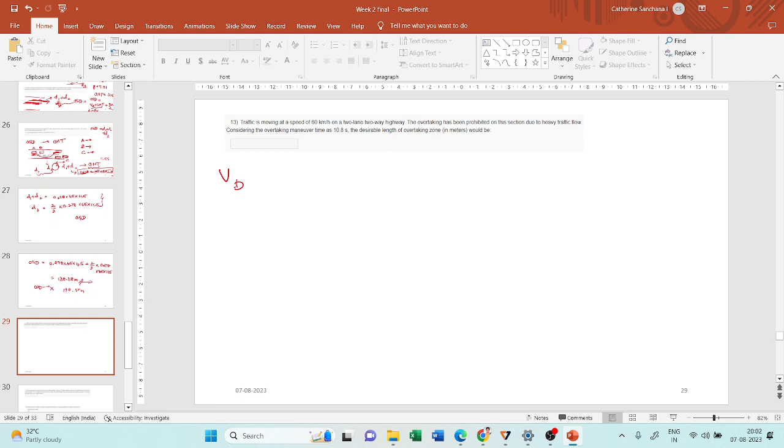So traffic is moving at a speed of, so VD is 60 kilometers per hour. The overtaking has been prohibited on this section due to heavy traffic flow. Considering the overtaking maneuver time, here also they've given overtaking maneuver time as 10.8 seconds. The desirable length of overtaking zone will be what? Okay, in some cases they will prohibit the overtaking maneuver. They will say that overtaking is not allowed. So they give you signs to say that you cannot make an overtaking action.

But you cannot simply be traveling behind a slow moving vehicle all the time, right? So they will give you a chance to overtake that slow moving vehicle in certain sections of the highway. So this is my highway, this is my two-lane, two-way road. There will be a section which they will call the overtaking zone. So they will say that you can do the overtaking action only in this section and not anywhere on the highway. This zone will be 3 to 5 times of OSD. So you know how to find out overtaking sight distance. You multiply that by 5, that is the desirable.

So the highest case you will give for overtaking zone. So you multiply that by 5 and you will provide that distance in the middle of some highway, and you say that this is the overtaking zone and you can overtake a slow moving vehicle only in this zone. But if you cannot provide such a long distance, such as 5 times of OSD, you can provide 3 times of OSD. So the overtaking zone distance can be 3 into OSD. Okay. So they've asked you the desirable length of the overtaking zone. So this is nothing but 5 times of OSD.

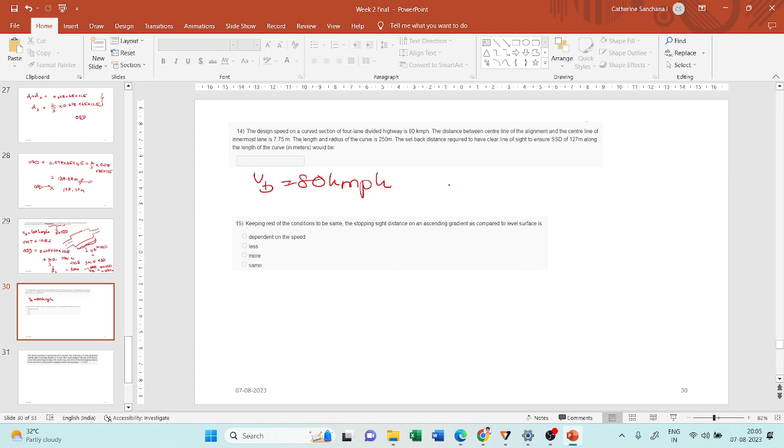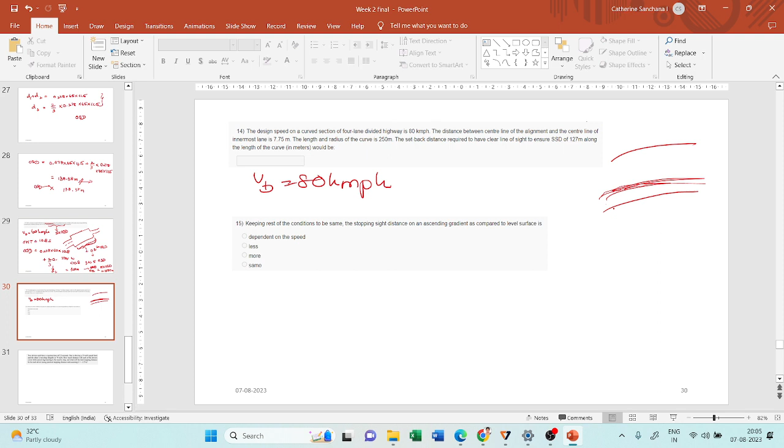Now moving on to the next problem. Problem 14. So the design speed on a curved section of a 4-lane divided highway is 80 kilometers per hour. The distance between center line of the alignment and the center line of the innermost lane. So we saw that SSD is always calculated with respect to the center line of the innermost lane. Okay, so this is where you find out SSD. So the distance between this center of innermost lane to the center of the highway, we saw that it is equal to D. Okay, and the length and radius of the curve.

So length of the curve, they have given it as 250 meters. Radius of the curve, they have given it as 250 meters. And the setback distance to have clear line of sight. So SSD, they have given it as 127 meters. So they are asking you to find out the setback distance. So it is a straightforward question, right?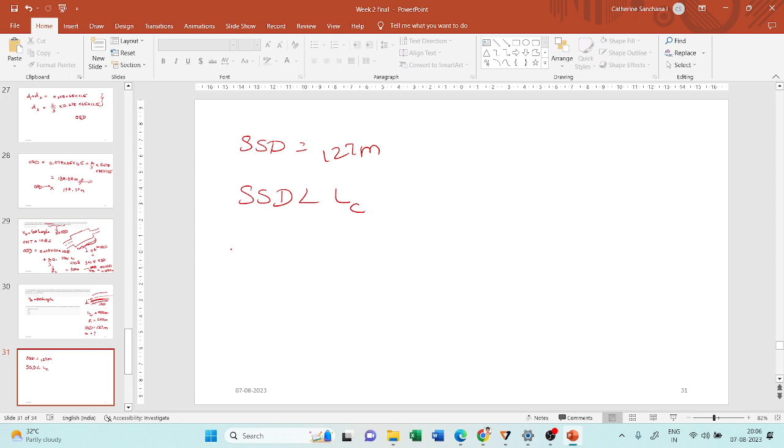So what is the formula? SSD is equal to what? 127 meters. So you know that SSD is less than LC. So there is an equation for SSD less than LC where M is equal to R minus R minus D cos alpha by 2. So R you know it is 250, D you know it is 7.75. They both are given in the question.

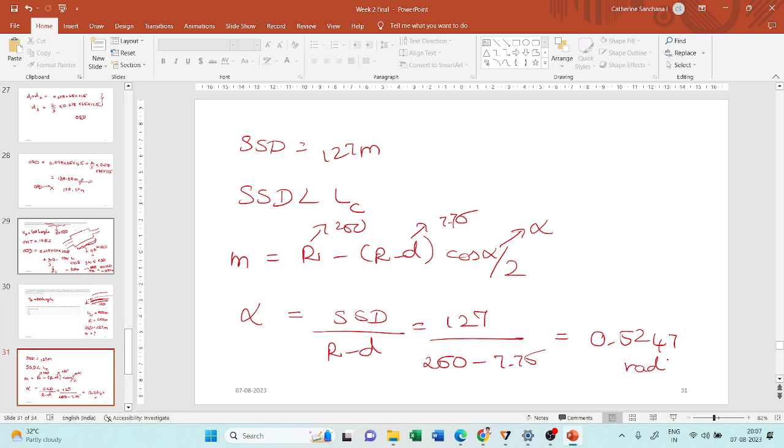Alpha is what you don't know, but we saw an equation to find out alpha also, where alpha is equal to SSD divided by R minus D. Okay, so that will be 127 divided by 250 minus 7.75. So D is 7.75, I'm sorry. So that will be equal to 0.5247 radians. Okay. Now you have to convert this into degrees because alpha is an angle, right? It will be 30.037 degrees.

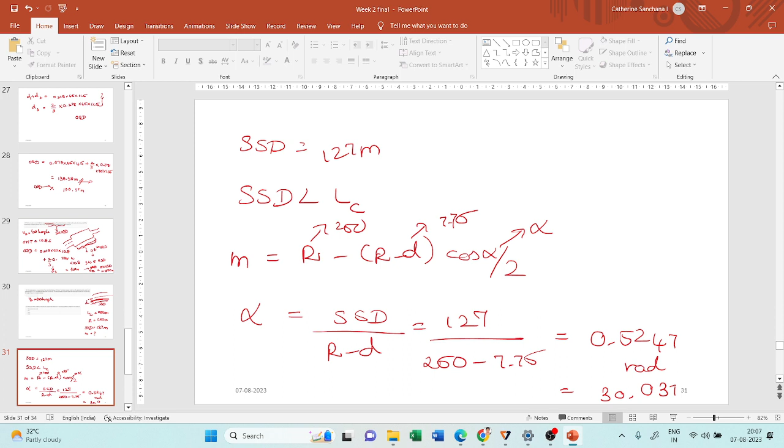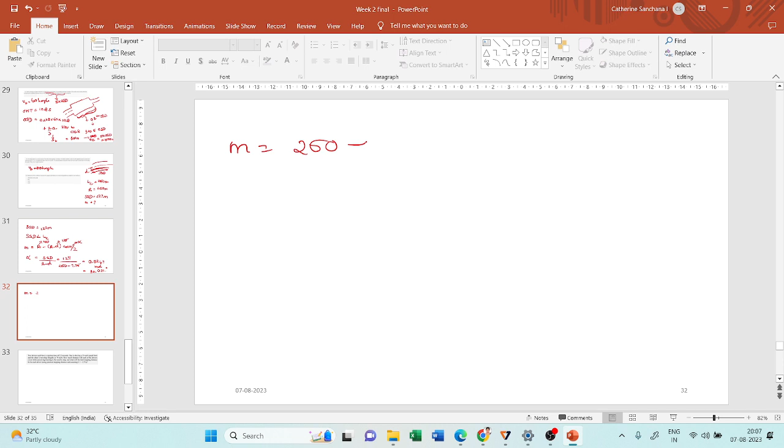Now you have to substitute this in the equation of M. So M is equal to R minus D, 250 minus 7.75, into cos of 30.037 divided by 2. So this will give me 16.02 meters. So this is the value of the setback distance.

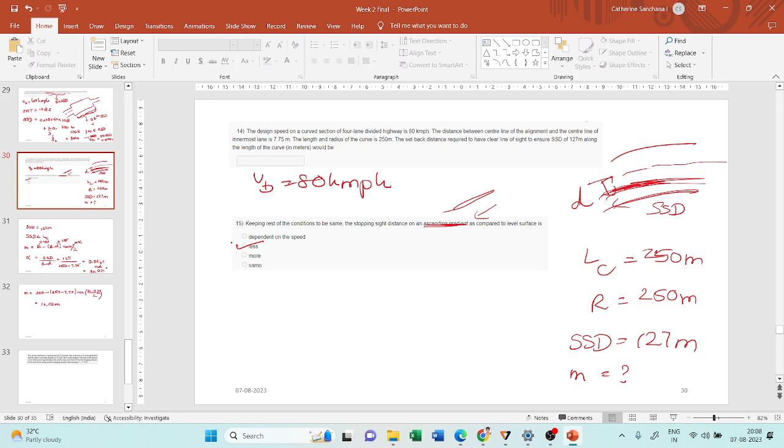Okay. Now keeping rest of the conditions the same, the stopping sight distance on an ascending gradient as compared to a level surface is what? So we saw that stopping sight distance on an ascending gradient will be less, right? On a descending gradient it will be more, and for an ascending gradient it will be less. Now, one second, I think I missed a question here.

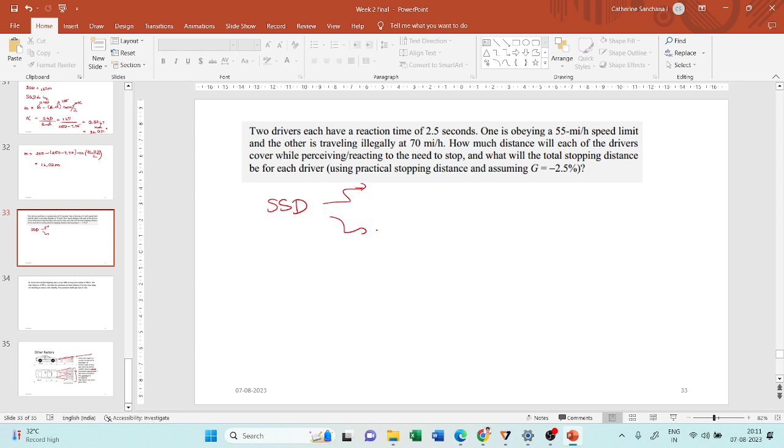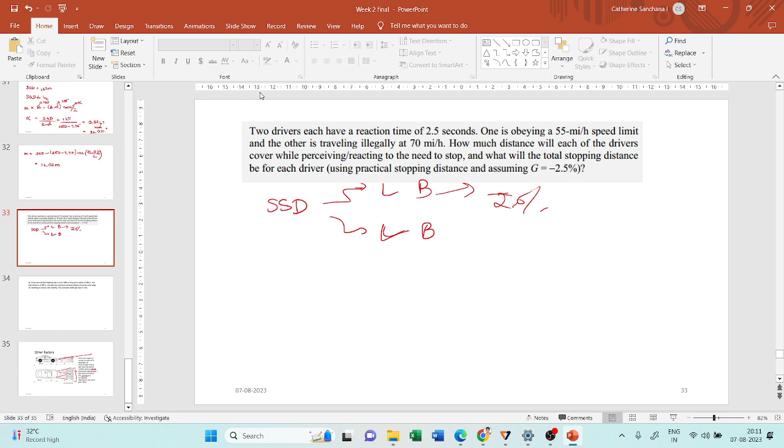So both your lag and braking distance will vary because their speeds are different. Okay, the reaction time is the same. They have given a downward gradient of 2.5%. So it is a very straightforward problem. You can solve this problem and one of you can give me the answer in the next session.

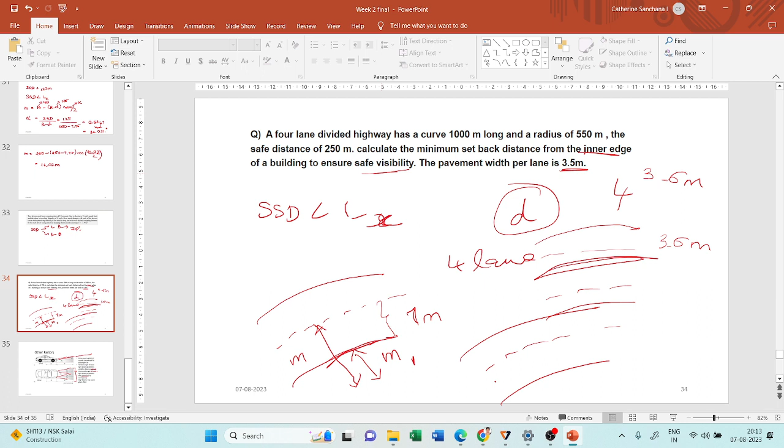And also they have not given you the value of D. In many cases the value of D is given, but in this problem it is not given. So how will you find out the value of D? So D is nothing but the distance from the center line of the road to the center line of the inner lane of the carriageway. Okay, so they say that there are 4 lanes. So this is the center line of the road. There are 2 lanes on this side. Okay, so 1, 2, 3, 4. So from this center line,

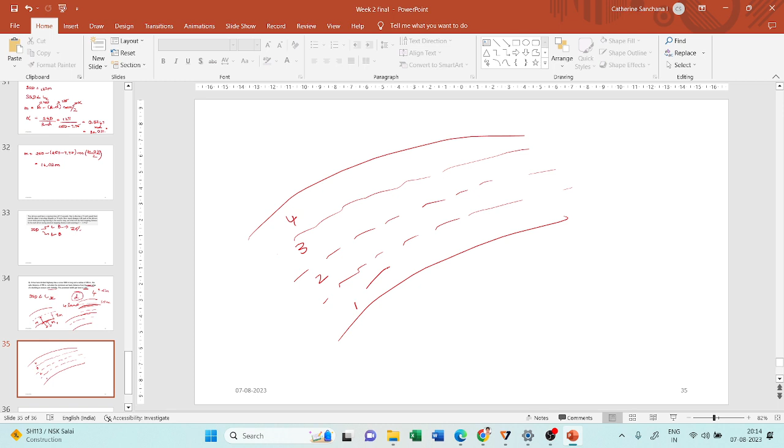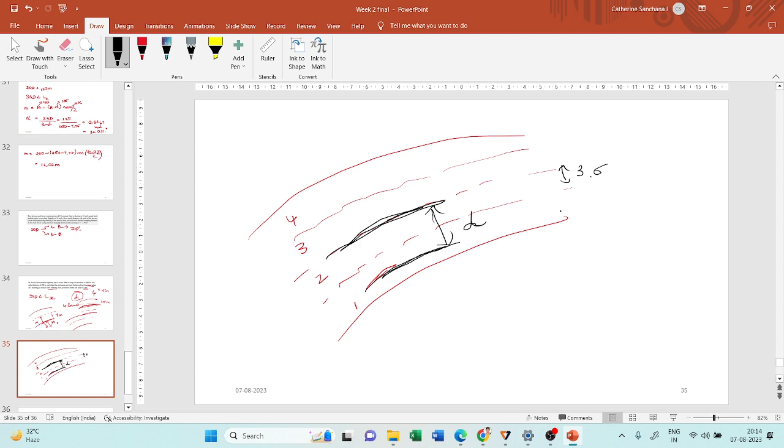so from the center line of the inner lane of the road to the center of the carriageway is what is D. So how will you find out D? Each lane is 3.5 meters. So D will be 3.5, this distance, plus 3.5 divided by 2. Okay. So this is how you will find out D. I hope this is clear. Maybe some of you can try this problem and show me in the next session.